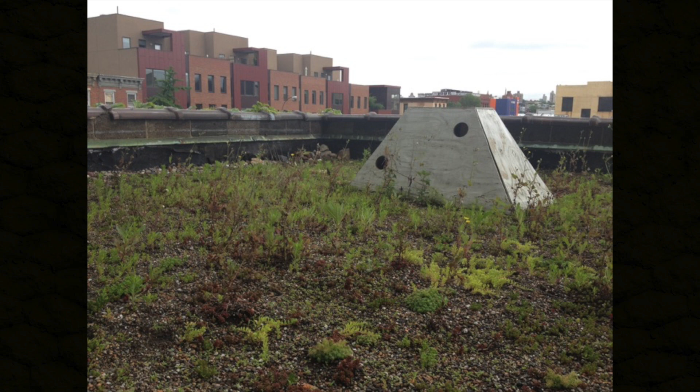We tested different green roof plants, thinking about which ones would really function in these shallow soil depths. We even took the post-industrial soil from the lot and brought it up to the roof, creating essentially a brown roof with a very thin soil application of 2 inches, to see what would emerge, what plants would just come, and created these little bird nesting habitats. It was really a place of play and experimentation, and the void created in 2008 gave us the opportunity to develop this foundation of ideas.

One of the first projects around weeds was this Profiles of Spontaneous Urban Plants. Essentially we were just looking at the plants around us. We were plant people, and at one point I felt, how can I not know all of these plants that are all around me if I'm interested in plants, yet I don't know the names, where they came from, or their histories.

So what we did was this two-part art project where we highlighted the weeds in front of our office as a way of distinguishing them to the passerby, and in a way, through photography, elevating their status. At the same time, we photographed plants from the yard, bare-rooted, and researched their cultural histories and habitat preferences.

Through that process, using your phone and Instagram, you're able to use the geolocator feature to map the location of the plant. So we had data and its location, and we were able to use that to generate this database. At the same time, we started to look at the different conditions, diagramming where these different conditions were occurring.

Are they pockets? Are they armatures, porous surfaces, or seams? All of which are again looking at the conditions in the substrate.

Then how can we, through a series of processes of addition, optimization, subtraction, or replication, work and augment those existing conditions and make them into these kind of built environments? So just beginning to play with this idea of how can we take those systems and translate them to our urban environment.

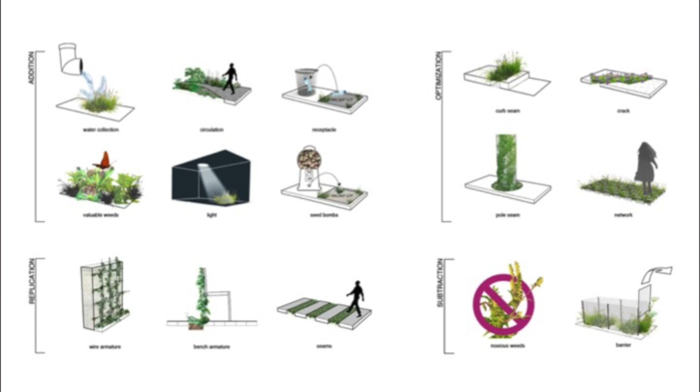And the idea of designing with subtraction, for one, was extremely interesting to me. So that's something you'll see take on form throughout some other projects.

The project then took a turn towards a website. We were able to use the Instagram-generated data to create this user-generated database of weeds. You're able to sort by plant type, and you're also able to sort by ecosystem services, like wildlife habitat. I'll talk about this a bit more, but each of these plants also offers a performative value to the city.

I do think, though, that hairy crabgrass is probably not the best ambassador for weeds, but it is something you find growing everywhere, a kind of ubiquitous plant that we all just pass by.

But in its prostrate condition, growing up between the cracks of the pavement, it serves a valuable benefit to slow stormwater. Its seeds offer wildlife habitat, and so it creates a host of benefits.

That allowed us to do a series of outreach walk and talks with a local public school here, local organizations, universities, where again we're trying to generate discourse. We're not trying to be didactic and say that everyone should start paying attention to these plants, but the reality is that a lot of them offer all sorts of benefits that we really need to take a closer look at.

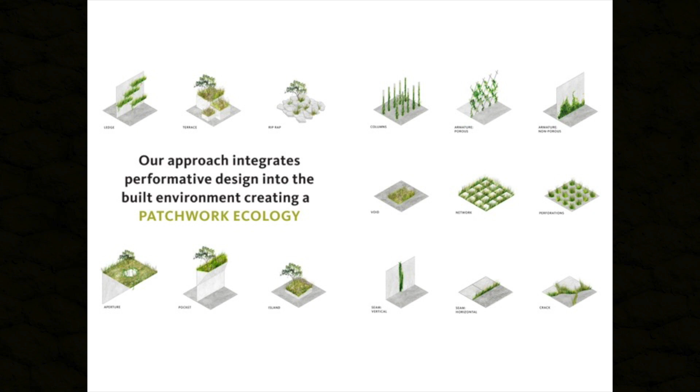Coming back to this, our approach really integrates this kind of observation of the urban environment, and then we look at how we can translate that into these built typologies that take the forms of green roofs, window boxes, planted parapets, courtyards, thickets, and urban meadows. Those then contribute these really vital ecological and human services to create more livable and resilient cities.

So this is a kind of ecologist tool, the way that they would apply a lens to any plant. We've just adapted that and used it for spontaneous urban plants.

So our approach: large parks and preserved lands are traditional components of the urban landscape. These are often overlooked, but more ubiquitous are the opportunities found in walls, roofs, lots, and streets. These smaller scale interventions, when stitched together, contribute to the ecological performance and livability of the city.

So I'm going to begin to look at a series of our projects through these different surfaces. Walls: 41 Bond, a project that we did with DDG partners.

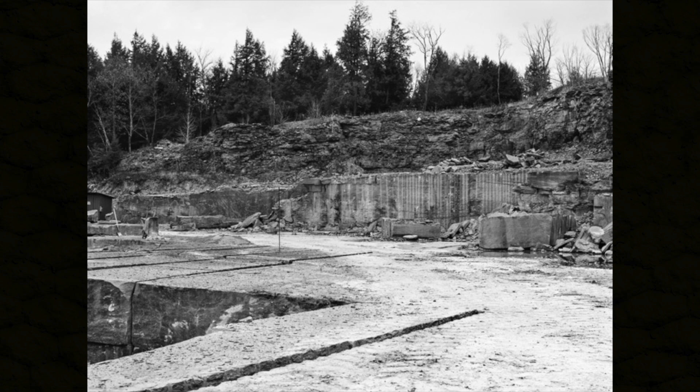The facade of the building is all bluestone. So some of our early investigative work was a trip to Tompkins Bluestone Quarry in Hancock, New York. Bluestone is a sedimentary material, and the way it lays out, there are all these fissures and cracks in the walls with plants emerging from those rock faces.

And so we were able to really collaborate. This is our second project with DDG, really able to collaborate on finding ways of integrating green into the facade and into the built form in unique ways. So there's 24 integrated window boxes, a ground floor loggia, and a planted canopy.

What was unique about this project is it's a north-facing facade. The window boxes are recessed into the facade so they don't get any natural rainfall. It needed to look effortless, I think, but yet it also needed to function.

That included integrating irrigation and drainage into the facade. It's all controlled by a central manifold in the basement. And finding ways of creating a planting design that was really legible from the street, so it becomes like a street garden.

But at the same time, these are individual people's bedrooms, and there needed to be a stronger sense of intimacy with the plants, that these things really registered with soft, almost specimen-like qualities, again outside people's bedrooms. So what we then created was this kind of vertical garden in the city.

Another project that looks at wall surfaces is Atlantic Plumbing in Washington, D.C., with Morris Adjmi. So again, a lot of our investigation really starts at the site. It's really our intention not to bring a strategy to a project, but to unearth the project by examining the existing conditions and revealing the latent conditions within a site.

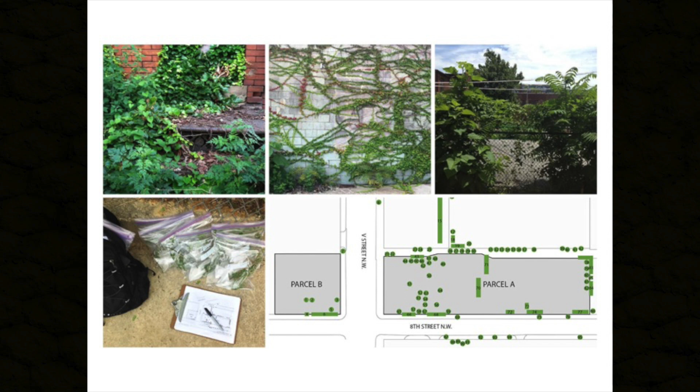So here again we're looking at the existing plants on site. We end up creating this 100-page index of all the different weeds that we found on site. We documented their location, height, breadth, and thought about their value to the project. Not that we would be able to preserve any of them, because the building footprint was really taking up the large part of the site, but that we could use these as inspiration for our own planting design.

And so we explored a number of strategies to weave green into the building. One of the most dramatic installations were these six 300-foot-long window boxes on the western facade. And then there are all sorts of planted green roofs and other green features to the building.

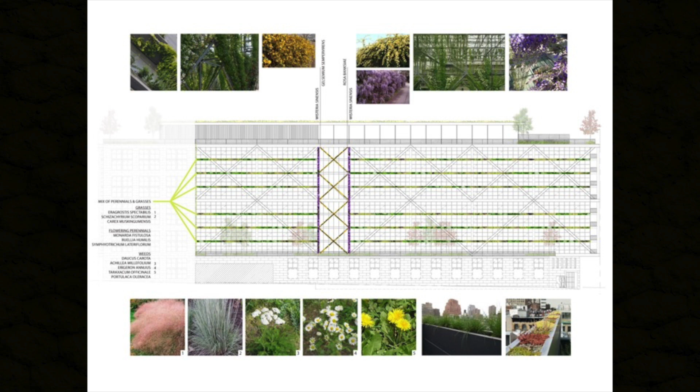Using the initial plants that we found, we tried to come up with landscape varieties that are locally sourced and available, derivative of those different species, to really create this kind of robustness. This, like 41 Bond, has a big maintenance component to it. How do you access these throughout the year and begin to maintain them? We have to think through all of those systems as we're pitching these to our clients.

These are situated outside people's living spaces. We wanted to create this sense of biophilia, that you're really wrapped within the green, and yet these really need to be low maintenance landscapes. So it's basically a lot of grasses and perennials, staying in the 2 to 3 foot range, creating this beautiful carpet at your feet, while your views open up to the distant city horizon.

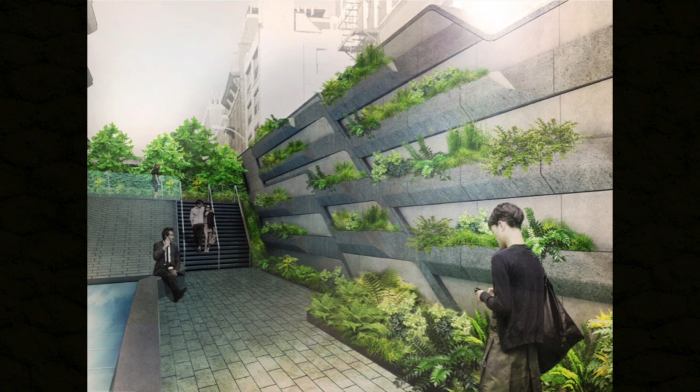These are little plant slivers and pockets of plants that pour out of the green wall itself. We wanted to play up the lushness and naturalness of the space, and really think about the size and texture of the plants. So there's a lot of ferns, a lot of large leafed plants, and then a lot of plants which draw on prehistoric roots that are kind of timeless. So it's almost like a grotto-like condition.

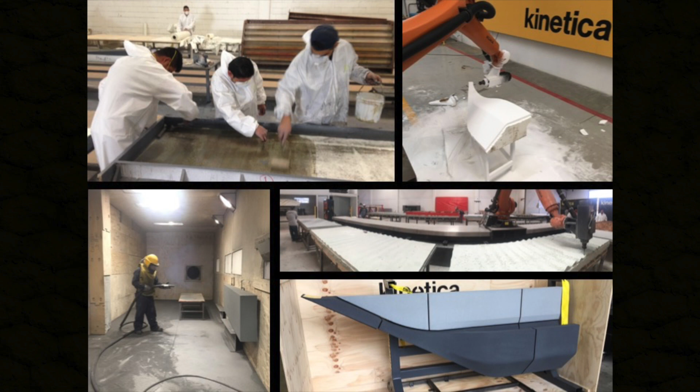But the actual construction was extremely complicated. This one we did not build, we just designed. We worked with a fabricator in Mexico called Kinetica who does really amazing work.

So this is all made of FRP, and it was digitally designed. We went through a series of mock-ups to get to this point, including a trip to Mexico to visit the modules and look at the color and construction. It was a very complicated system to integrate irrigation and drainage and do something that I think none of us had ever really done before.

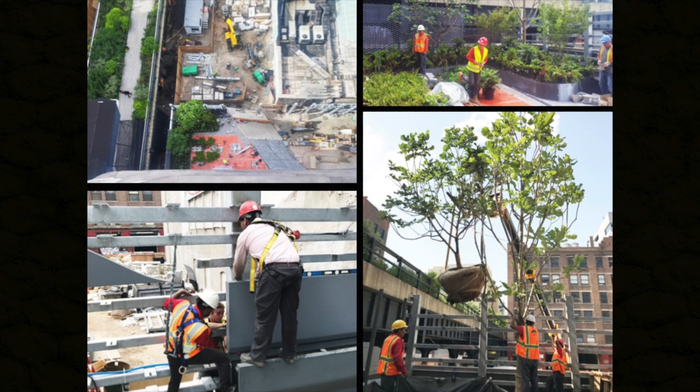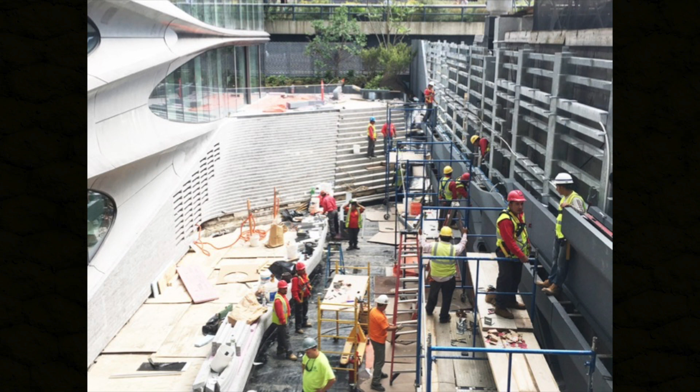This project was installed last fall, so we're still waiting to get it photographed later this year. You can see some of the construction installation shots, the large leaf magnolia tree being installed, a lot of the ferns, and the real heavy frame and construction that goes into creating something like this.

So rooftop projects are obviously a big component of any kind of urban landscape, but I think that's rather something new. It's really something that we've seen post-2008 take on form as this new typology within landscape architecture, and it almost aligned with green infrastructure and other performative landscapes. So this is Empire Stores in Brooklyn Bridge Park, a collaboration with S9 Architecture. This is the historic photo of the site - it was an old coffee warehouse where all the coffee came into Brooklyn from.

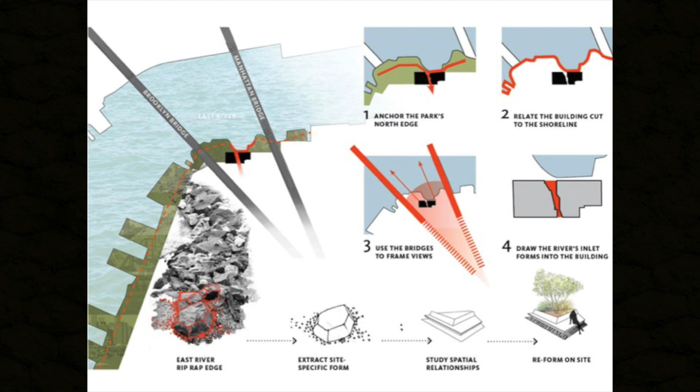Huge, kind of massive building, really situated at the north end of Brooklyn Bridge Park, between the Brooklyn and Manhattan bridges. So the building itself was low and broad and massive, and it really anchored the northern edge of the park.

But at the same time, the architects wanted to introduce this kind of cut into the building, and we found that the cut really mimicked the shoreline and related to the shoreline. So we wanted to use that as a strategy, and also the framing of views of the bridges.

To create and kind of abstract this form from the river's edge, we used this kind of extraction of the riprap in front of the building to create these distinctive planter benches which organize the fifth floor public terrace.

Overall, there's roughly 70,000 square feet of green roof on the building, with all sorts of different commercial spaces, including West Elm's new headquarters. Brooklyn Historical Society has a small museum outpost there. We're working with Soho House to do the 6th and 7th floor terraces.

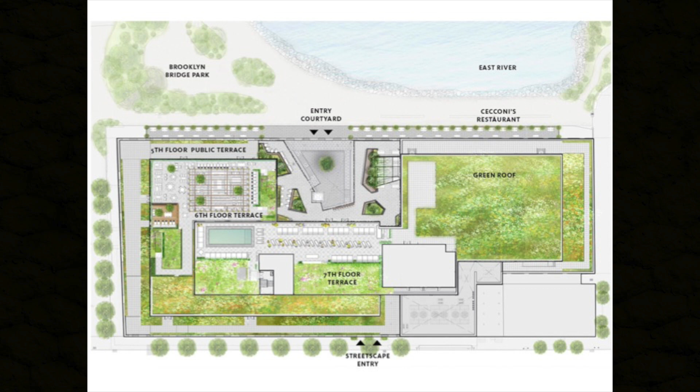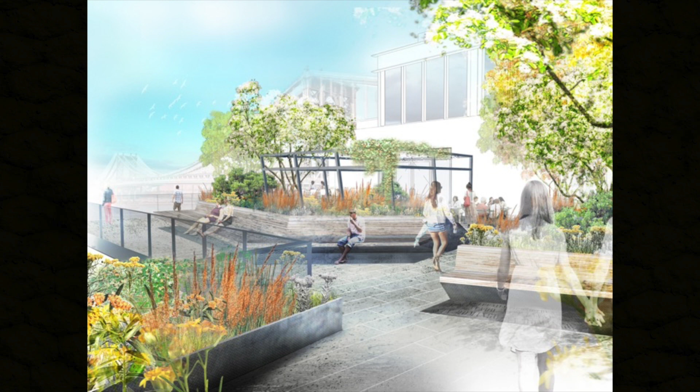But for us, the real fun part of the project, in addition to all those roof spaces, was this kind of fifth floor public terrace. So there, again, we use that kind of riprap idea to form these sculptural island planters.

They're wrapped in diamond plate steel. It's a traditional New York material that we see often on the front of buildings and then kicking out over sidewalk vaults. So it's a material that wraps from surface to ground.

And so we wanted to use that as a strategy to play out underneath the benches, using reclaimed wood from the building itself to create these dramatic chaise lounges. You see how the diamond plate is the base of the bench itself and then kicks out as a floor tread.

Simple kind of parapet bar installations. There wasn't a lot of fixed elements on this project -- we wanted to allow it to be this kind of eventscape.

But then, what clients asked for was a green roof, right? Which I think a lot of people now think is like a sedum-based kind of application. But what we look to do is take any of those traditional moves of green roof and see how we can amplify and optimize that.

So drawing on our experience of studying urban adapted plants, we wanted to create something that creates a lot of volume out of the green roof. We're working with roughly 6 to 8 inches of soil here, but we're able to get 3 to 4 feet of volume out of the plants.

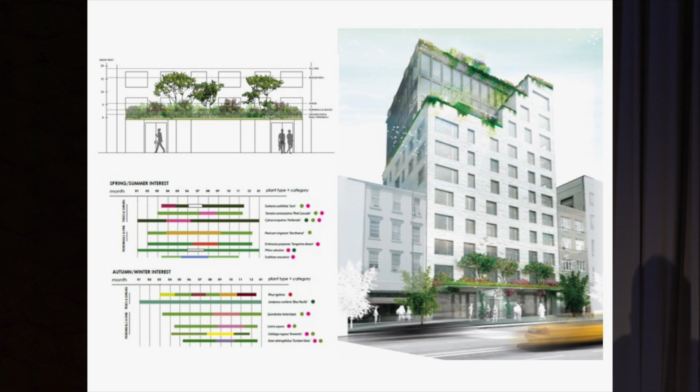Our process really starts through looking at unique ways we can integrate green into the built environment, and then through a careful calibration and study of plants and seasonality.

Every garden that we create is really inhabited by people all year round. So we really want to think about the seasonality of the garden and how we can weave in color and texture through an orchestration of plants that emerges at different times and creates these dramatic moments within people's days or seasons.

So this planted canopy kind of drapes through these amoeba-like kind of openings.

We design the roof to have soil which undulates from 2 inches to 20 inches. It mounds up to accept some of the smaller tree material, which we planted relatively small, but in the last couple of years it's really filled in to kind of 15-foot high trees, and attracted retailers like Sorel and Columbia, brands whose ethos mimics this performative green approach.

And then as the plants drape through, these are clematis, but there's even moonflower vines in there that open up at night. So this is not just a season to season orchestration of plants, but even within the day, moonflowers open up in the evening when the meatpacking district is really bumping. So there's even a kind of ephemerality that landscape can bring to a person's day.

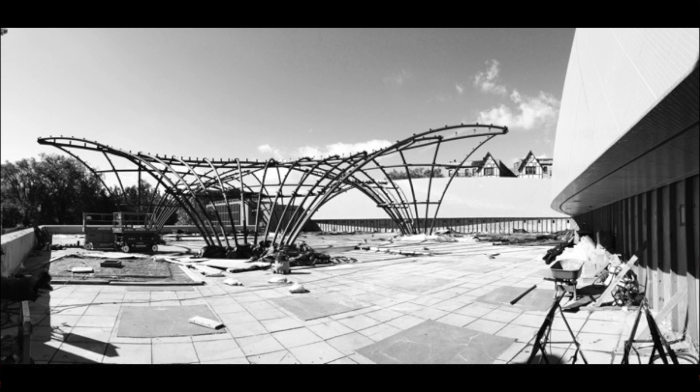At the Brooklyn Children's Museum, which we designed, built and completed earlier this year, it was a collaboration with Toshiko Mori Architects. This is their open-air pavilion that is stitched into Rafael Viñoly's 90s building of the Brooklyn Children's Museum.

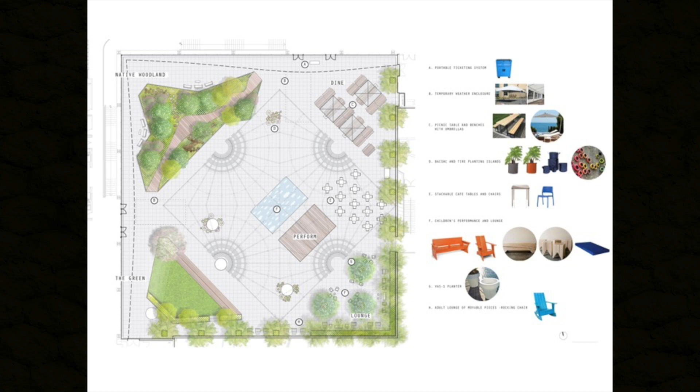We were tasked with creating the furniture and the garden experiences underneath this canopy on this 20,000 square foot rooftop garden. The way the canopy was situated, you can see it in light gray there, it naturally played itself out that we wanted to create a series of quadrants: in the upper left, native woodland; the lower left, this open, flexible green space for exhibits or performance; the lower right, the lounge area; and then the upper right, dining area.

These look to stitch into the interior building programs, but also take advantage of some of the natural site conditions and shading opportunities that might be available. So a lot of our work really looks at program.

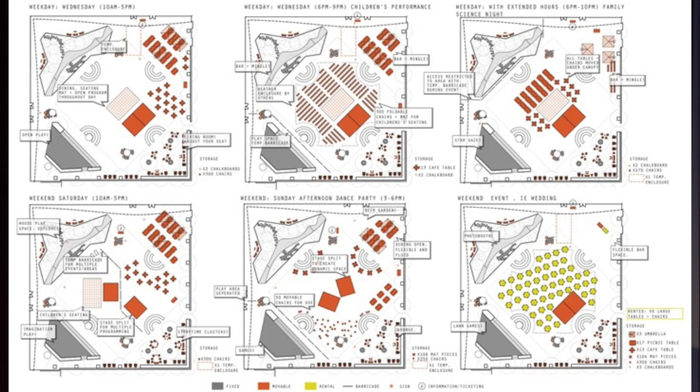Obviously, we're dealing with a lot of urban spaces that are highly used and often flexible from one day to the next. So we imagine what these spaces might be, from a kind of wedding on the lower right with all these 10-top tables on a Saturday night, to a weekend play space on the lower left, where kids take over the next morning. So everything had to be stackable, foldable, storable, but yet we also wanted to create these larger gestures that hold the site together and provide these anchors of green space underneath the canopy.

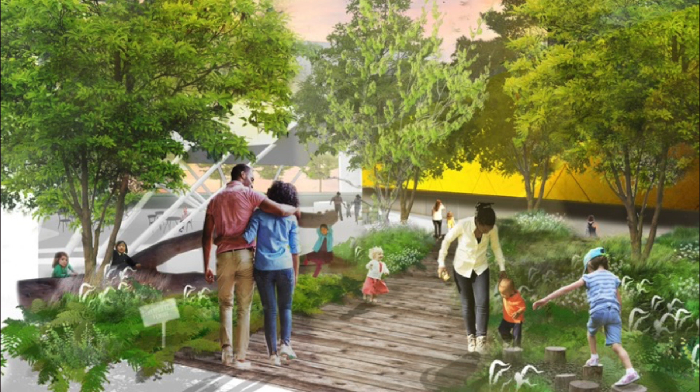So one idea was to explore this idea of natural play. A lot of our research for this included a trip to Prospect Park, to the natural exploration area that was created with trees felled from Hurricane Sandy. It's just this idea that you really want to get kids away from rubber surfacing and having everything be safe, and introduce them to natural elements.

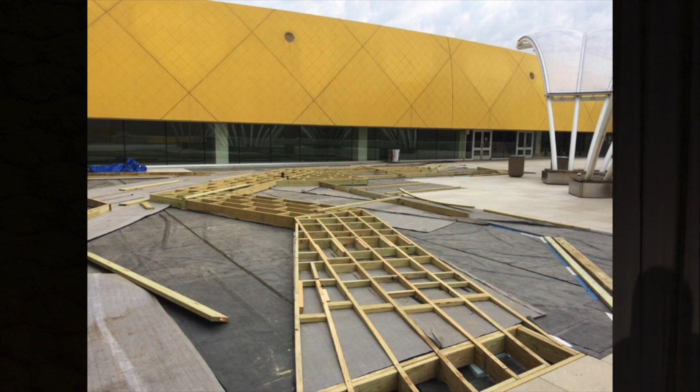I think a lot of kids grew up in New York City not really knowing that dirt exists underneath all the pavement. So getting the tactile experience of natural materials and creating this more immersive experience, it started with the fabrication of this deck woodland walk. You can see it realized here, taking its cues from almost like a state park to create these little details and ways of slipping the user through these more lush green spaces, but then providing these opportunities for play.

And the anchor of the green space coupled with the flexibility and movability of a lot of the furniture creates this real kind of dynamic balance.

So we're also really interested in exploring lots. We happen to live and work in Red Hook, Brooklyn, which is kind of at the fringes of the city and has a lot of open spaces. So we were drawn to Red Hook for its open space, its sky, its light, its air, but also the rugged qualities and vast open spaces that were there.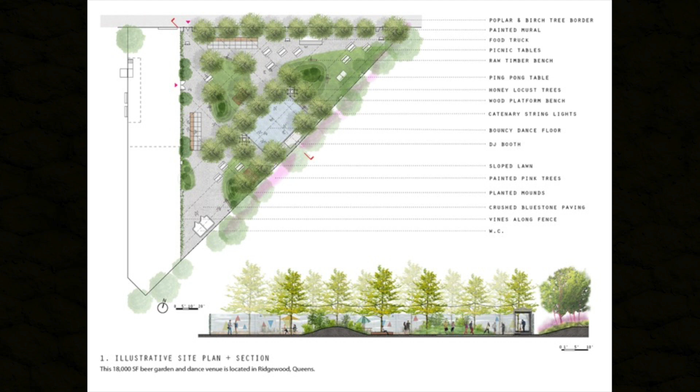So the idea was to create this grid of trees over the site, a grid of honey locust trees, which created this lush canopy that provided filtered, dappled sunlight. But that form harkened back to DEP state reclamation sites, where grids were used as a planting strategy, and where plants were used for their performative qualities, often to absorb toxins and heavy metals from soil.

So honey locust has phytoremediating properties. And this site, in addition to us capping it with gravel and decomposed stone dust, we did a lot of thinking about plants which could also, in a passive way, slowly remediate the existing soil. So the grid of honey locust trees is all around this central dance floor, and then there's these 3 earthen mounds which provide this kind of backdrop to the space.

So you can see the grid of honey locust trees, string lights, and then pops of color. This kind of weedy landscape that was really inspired by the existing site features.

The site, I should also note, abuts along its longest side the CSX rail line. And so we wanted to use that backdrop as an opportunity. Taking a page from the artist Katharina Grosse, who does a lot of painted landscapes, we painted a lot of the weedy shrub and dead tree material that was adjacent to the site. And it provides these really fun moments that people didn't even necessarily realize when they first get there. But as they wander over, they kind of see these glimpses of this spontaneous and playful landscape.

Again, we think a lot about program, and so how can this space really flex from Friday night movie to Saturday night dance party to Sunday afternoon lunch? So again, we're always thinking about these kit of parts and how they can adapt and change to the different uses that our urban spaces are required to offer.

And so you see how that program plays out. There's just simple picnic tables that are painted to give it a splash of color, simple bar setups again. You see this wooden platform on the right that provides informal ways of sitting. People get to sit up there cross-legged with a glass of wine, or they can dance there during the dance party.

There's ping pong, there's bocce, there's other kind of playful elements. The idea is that you're really functioning out of someone's backyard. It's a real casual, friendly environment. Food trucks. And then here you can see we left a couple of the existing trees in situ. So there's a large ailanthus tree coming out from the top of the food truck, and then we planted the fence with a lot of quick-growing successional species. These are black cottonwood, but other things like sumac and birch.

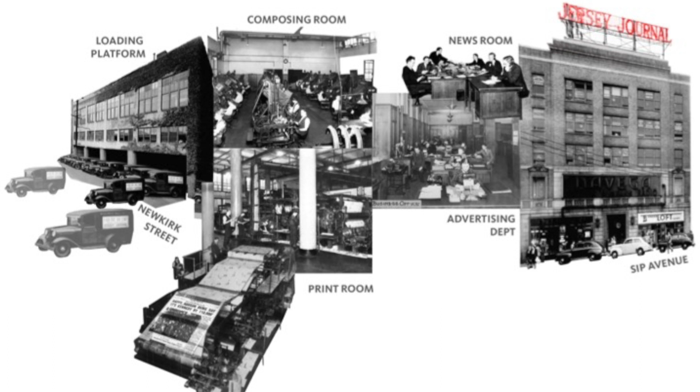We were interested in this building. The developer had bought it along with an adjacent site, intending to tear down this historic building. We felt like diving into the history, going to the local public library, and we found amazing records and historic photos of the building and its different spaces. It felt like there was too much history there to let it go in its complete form.

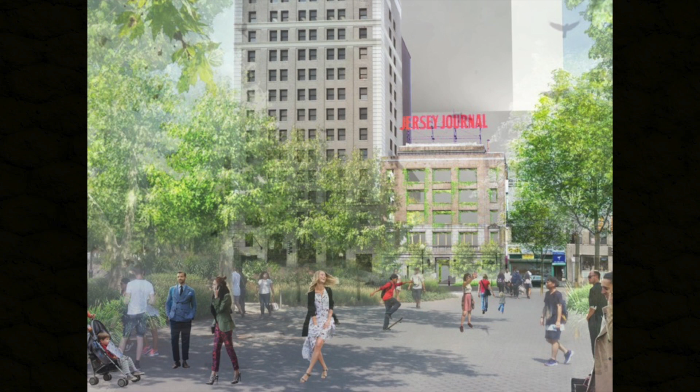So how could we use the existing frame of the facade to create a gateway to a new type of space? Here you're looking from Journal Square Plaza to the facade of the building, which we integrated with window boxes and a planted facade, keeping the historic Jersey Journal sign and facade.

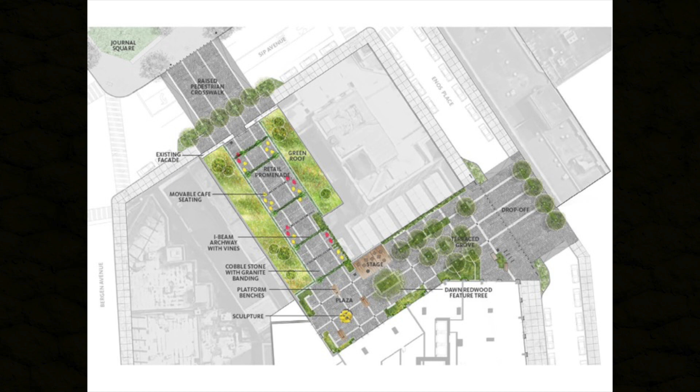We 3D scanned the entire building and looked to keep its existing steelwork. On the upper left you see the existing facade, punctuated with a plaza-like condition, a promenade that runs through two one-story retail bars and becomes a new office and residential plaza, a real public amenity space within Journal Square.

Journal Square is increasingly densifying, yet there's very little park space available, so we're excited to see this realized in the future.

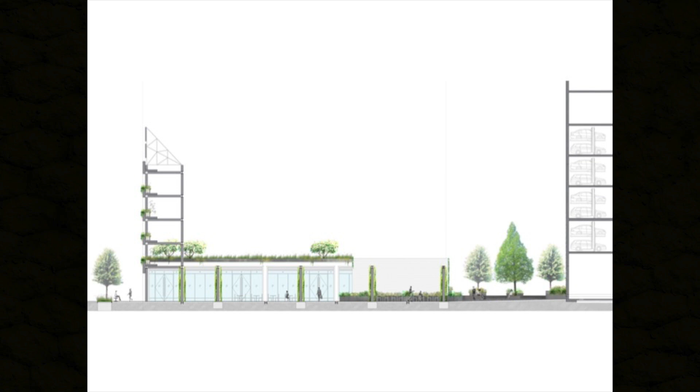A section cutting through the space shows the existing facade work, the one-story retail bar with green roofs, and the green columns anchored to the existing metal framework.

By keeping that, it not only allows us to retain memory or history of the existing building, but we're able to use it as an opportunity to create lighting and plant armatures for a more enveloped green space. Even where columns are truncated or removed for various reasons, we use them in the paving as layers of memory throughout the site, becoming a flexible urban plaza with integrated planters, benches, and small performance spaces.

One of our first projects, back in 2008, the first big project I got, was Castle Braid Factory, which is in Bushwick.

This is Betty Smith, who wrote A Tree Grows in Brooklyn, outside her house in Williamsburg with an ailanthus tree, which is kind of amazing. The protagonist in the book worked in the Castle Braid Factory, and we thought that was an amazing coincidence, using it as inspiration for the garden itself—this 6,000 square foot courtyard.

It becomes a real social hub for the building. This was one of the first buildings to go up in the Bushwick neighborhood. It started a process of gentrification, but it also became a kind of artist enclave with all sorts of interesting programming and social networking happening within the building itself.

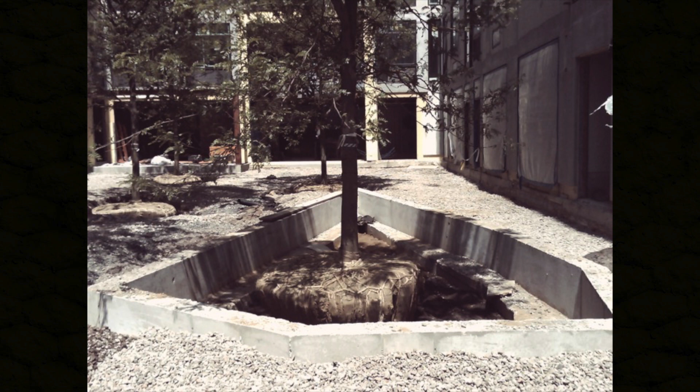This one is situated within a frame that will be covered with decking, providing a connection back toward the lobby, with the street visible beyond. It was an intimate garden, a small-scale space, but one that is playful and incorporates a lot of different ideas.

Part of this was not necessarily having control over a project. We knew all these surfaces were going to be part of a graffiti project, so we created certain blank surfaces within the garden that could be augmented and changed over time. Other elements integrated benches and swing elements to play up the social and fun aspect of the space.

Integrated lights in the paving provide a dramatic effect at night.

Okay, so moving on to streets.

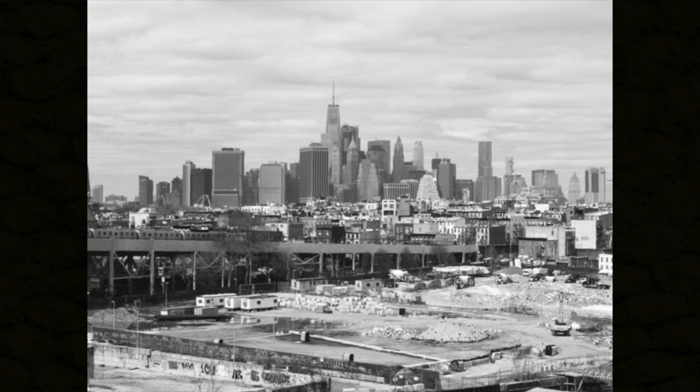This is another early project, from 2010, the MTA Plaza at Carroll Street in Brooklyn. If you've taken the F train, this is the point where the elevated train dips down underground. So it's a unique point within the city's fabric that we wanted to find a way of highlighting.

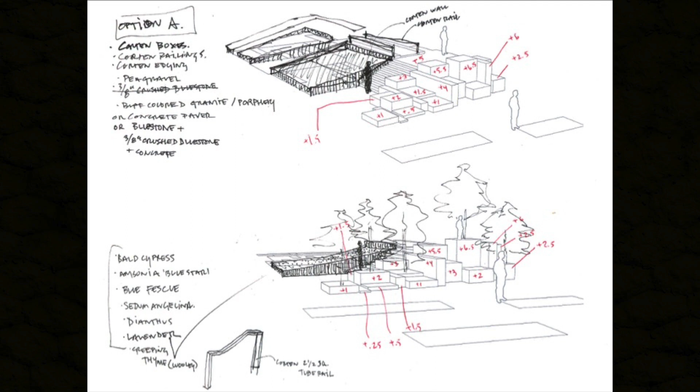We were tasked with creating this 3,500 square foot space in front of the building, negotiating a 4-foot grade change between a very private building entrance and a very public subway entrance that gets 5,000 riders a day. We wanted to interpret that train going underneath the ground and the reverberations you felt on site by creating a fractured, stepped landscape to negotiate that grade change, then integrate paving that radiated out from that stepped garden and colonize the corner of Smith and Second Place.

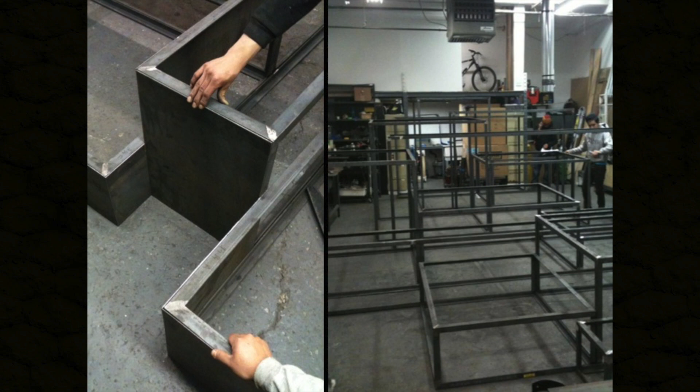So we designed and built this project, working with a local steel contractor to do the metal work and really create this stepped garden.

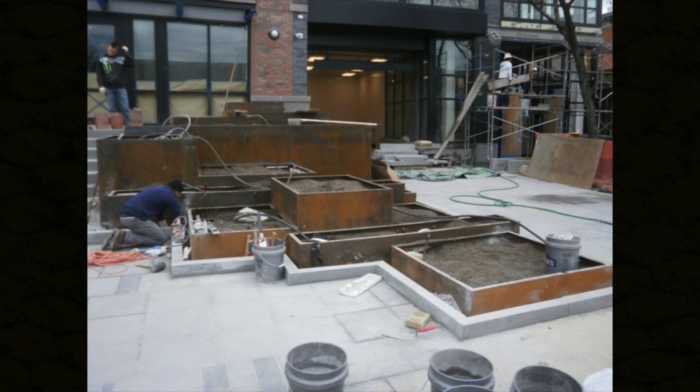It's funny, people don't often admit mistakes, but in this project all the paving lined up with all the metalwork, except I forgot to account for the width of the steel cladding. So when we actually installed it, none of the paving was lining up. If you look closely, one of the planters was cut and has an inch removed from it, but nobody knows. The process of making things is not without mistakes, and that's how you learn—through actually designing and building this thing, even though we'd never done it before, to get things realized that you can then improve upon in future projects.

So it's taking its form here. It provides a really great neighborhood entry, and again, attracted great retailers like Momofuku Milk Bar, along with this dramatic planting design which is wild and overgrown, yet softens the more industrial materials.

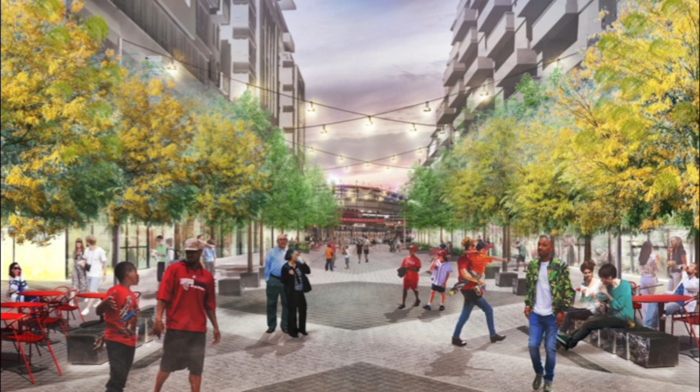We looked at the existing L'Enfant plan and drew deep research into the geology and locally available granites around the site. What we were able to do is create this one-block pedestrian plaza in front of the stadium—it's DC's first curbless street, and also the first street to have catenary lighting over public space. It functions as a typical street most days, and on game days it gets closed at both ends and becomes an engaging public plaza.

On the left-hand side, people exit from the metro station, then process down to the right, to the stadium. We wanted to use this super graphic of granite unit pavers to bridge across the site and engage people, to get people to really engage with the street itself.

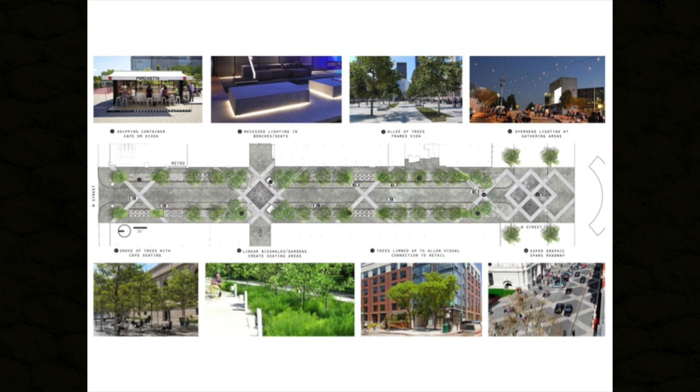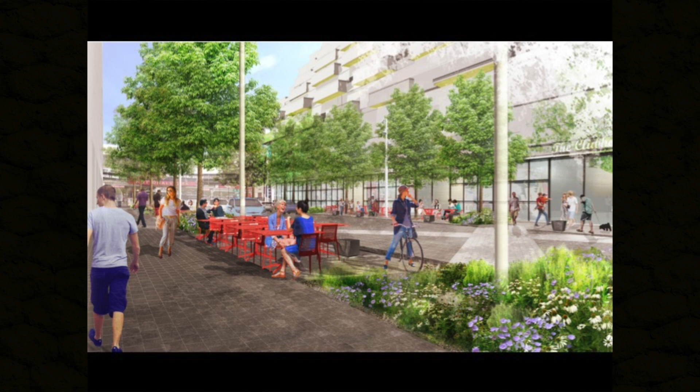We did a lot of material research, finding ways of using all sorts of different granite and concrete pavers, and ideas about taking traditional tree pits—5 foot by 10 foot—and smushing all of those together. So taking the components of a typical street, but modifying it.

What we were able to do here is get these large, 11 foot by 40 foot long planters, which will be much more resilient on this heavily trafficked site. So using the same ratios of planting to paving, but in a different way that offers more resiliency and also more performative quality.

These are all stormwater bioswales. They accept all the water from the street—you see that there.

In wrapping this up, I was really inspired by Commissioner Silver from the New York City Parks Department, who said parks represent 14% of the city's footprint, and streets and sidewalks are another 26%—that's 40% of the city in the public realm. So we see that as a unique opportunity. Streets are, for me, the new frontier of urban public space. How can we find and utilize that realm and design it toward the public's good, not just in a social way, but in an ecological way?